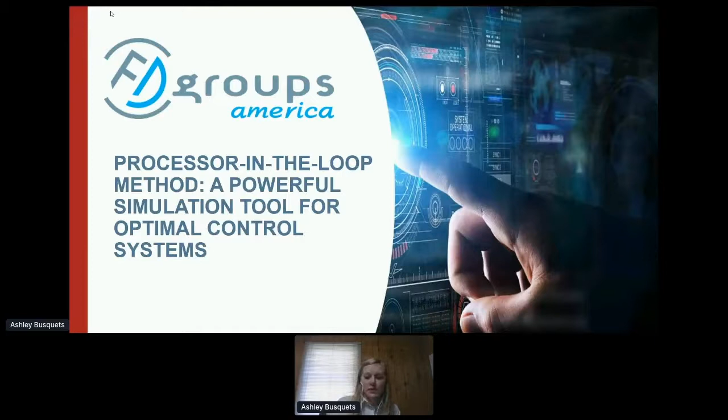So today I will be talking about processor in the loop. This is a method that's a powerful simulation tool for optimal control systems. As Mike discussed a little bit, our parent company is the Fluid Design Group in France.

This includes Cerebrum Engineering, which is the engineering and multi-physics simulation, Fluid System, which is focusing on systems and components for fluids, FDE, which is the electronic components and ECU, and then under these groups are also the FD groups America and in China, bringing the expertise of the entire group into these regions.

FD Groups America specializes in multi-physics model-based design workflows. We specialize in design with simulation, and this includes testing to feed the model, to validate the models that we create. We work closely with any collaborators that we have to meet the requirements that are necessary to the projects.

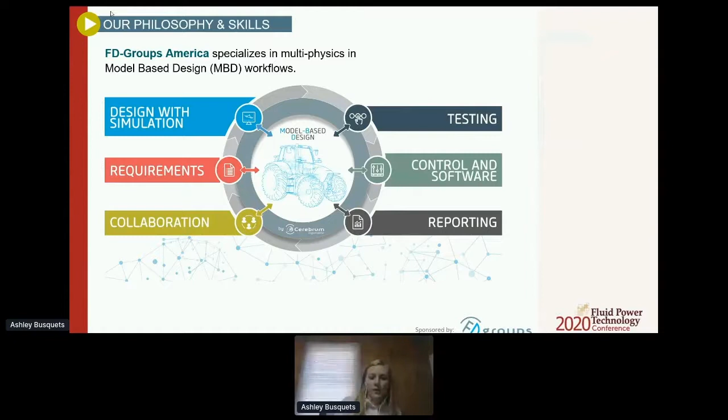Also included in the part of the simulation, which I will speak more about today, is the control and software aspect. And then finally, like I said, working with our collaborators, reporting in the end to give the best outcome of a project possible. We work with 1D multi-physics systems modeling, but we also include 3D systems as well.

This includes the FEM in the multi-body structural analysis. And we can also do some co-simulation between the 1D and 3D to really have a very precise model. Included in these models, we can consider the CFD when it comes to aerodynamics, hydraulics, even thermal. And again, what I will focus on today, the control systems.

So designing and tuning supported by model in the loop, software in the loop, and processor in the loop. And also reverse engineering, so component characterization in order to feed our models such that we have a well-working model. And also there's a part that we can do tools and specific applications development for various companies that need something more specific.

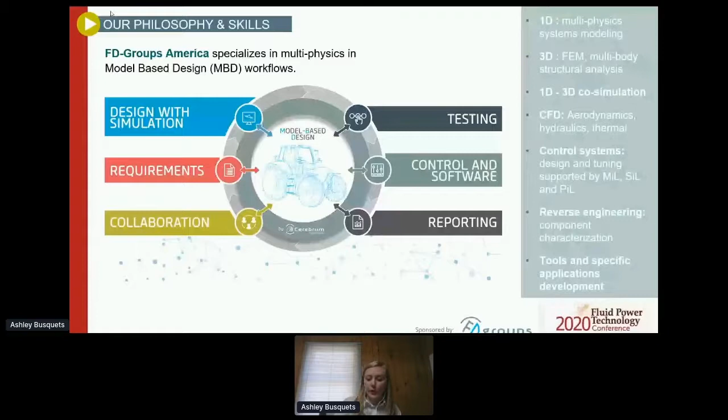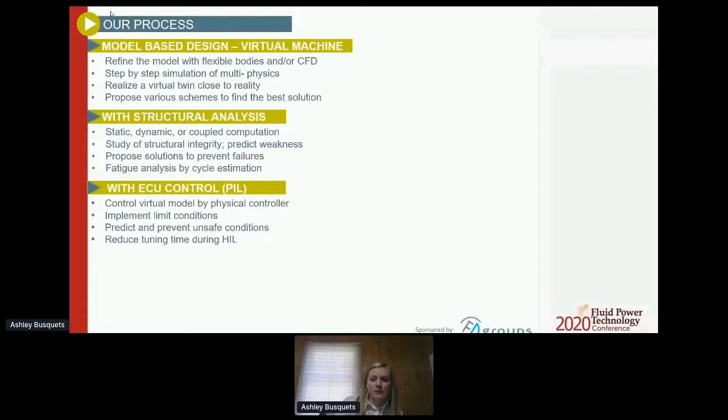Our process, like I said, this model-based design, we start with 1D multi-physics modeling to create a global virtual machine. We can feed this model with 3D dynamics, so considering the flexible body, or also the thermal flow CFD, as well as, as I said, the reverse engineering.

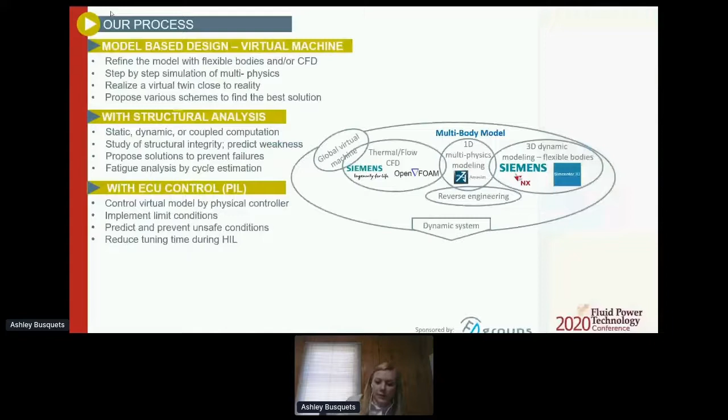And once we have this complete dynamic system, we can focus on a structural analysis. And so from this dynamic system, we can deduce the forces on the parts, feed this into a FEM analysis on each component, understand the stresses on each part, and get a durability lifetime of the part using the SN curves. But again, what I will focus on today is the PIL method.

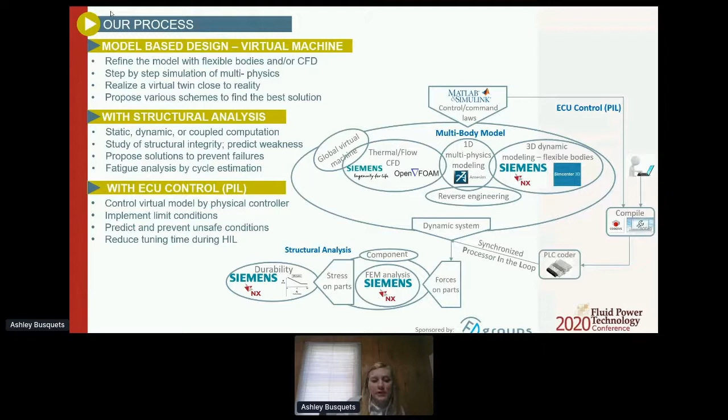So we can control the model virtually, but through a physical controller. This way we can predict any unsafe conditions in which we're able to prevent these in the field then, and also reduce the tuning time during the HIL method.

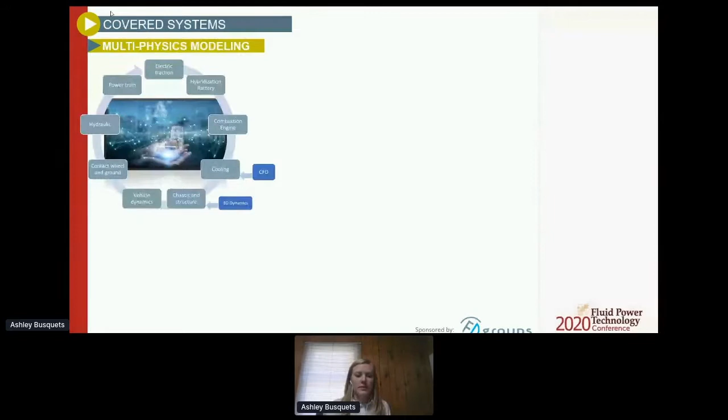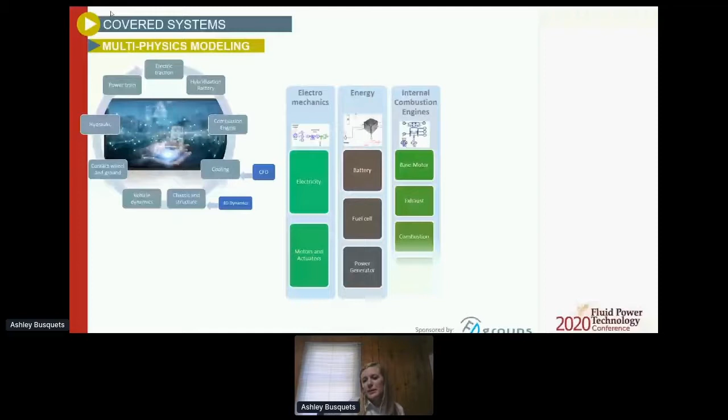We cover all systems. So when I say multi-physics modeling, I'm speaking of a complete model. We can include the electromechanics, the energy, internal combustion engines, any thermal considerations, mechanics, hydraulics and pneumatics, and then, like I said, focusing today on this control. Just a few definitions as I go forward to make sure we're all on the same page.

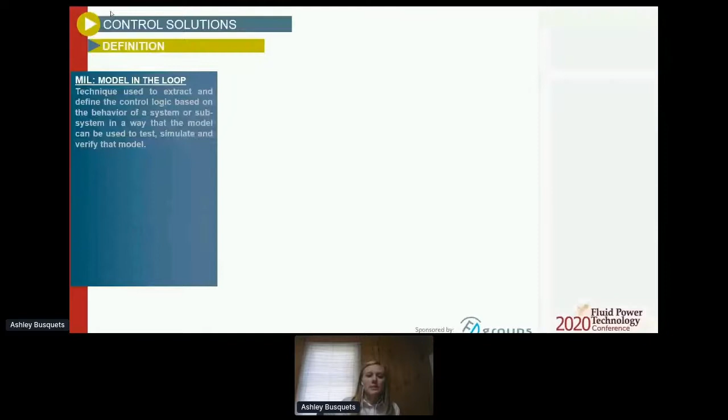The model in the loop, the MIL method, is a technique used to extract and define the control logic based on the behavior of a system or subsystem in a way that the model can be used to test, simulate, and verify that model. So this is the first level of validation for any algorithm. And from here, we decide on the choice of controls.

At this point, the model is very precise when it comes to the dynamics, including everything possible. But it's a long calculation time, and the control system and code is not as high of a level as it will be later on.

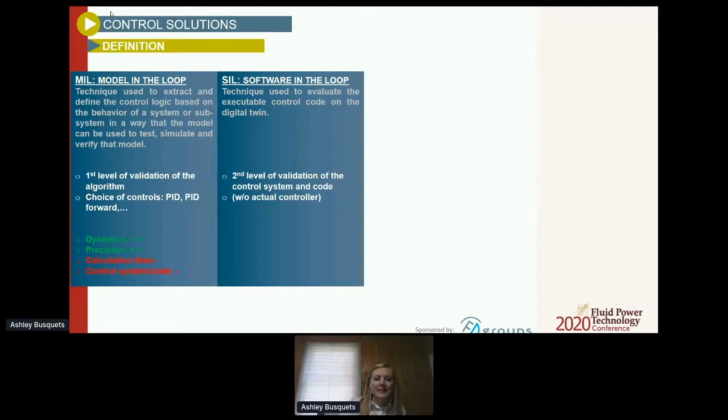The SIL method, which is the software in the loop, is a technique used to evaluate the executable control code on the digital twin. So here, this is the second level of validation of the control system and code, but this is at this point without the actual controller in the loop. Still, we have very high dynamics and precision, a longer calculation time, but we're working more toward a higher level control system.

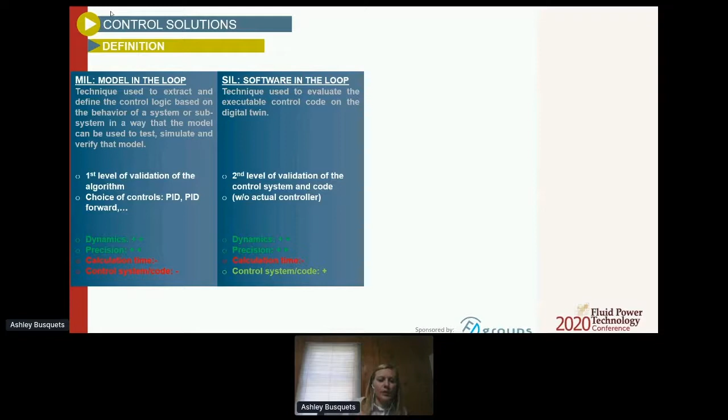From there, we go to the PIL asynchronous, which is a real-time model. This is a technique used to evaluate the processor with the executable code on a simplified digital twin in real time. So this is a third level of validation.

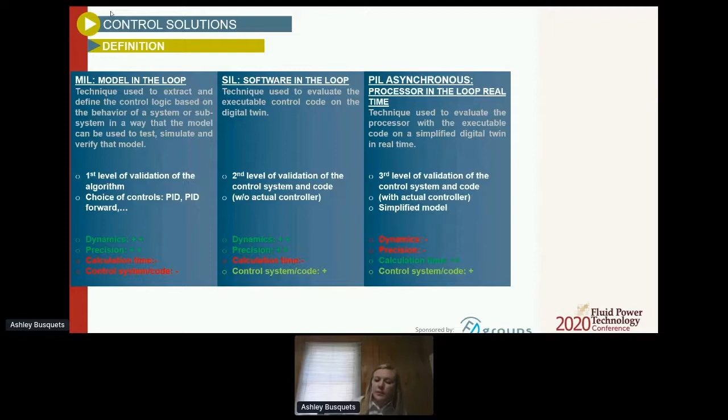And at this point, we actually connect a physical controller, but it's on a simplified model such that we can reach that real-time communication. So the real-time model is quite a bit simplified. So the dynamics and the precision are not as high, but we have a much faster calculation time and still a good level of the control system at this point.

And then finally, the PIL synchronous. So this is the processor in the loop synchronous. It's a technique used to evaluate the processor with the executable code on the complete digital twin. This is the fourth level of validation of the control system and the code.

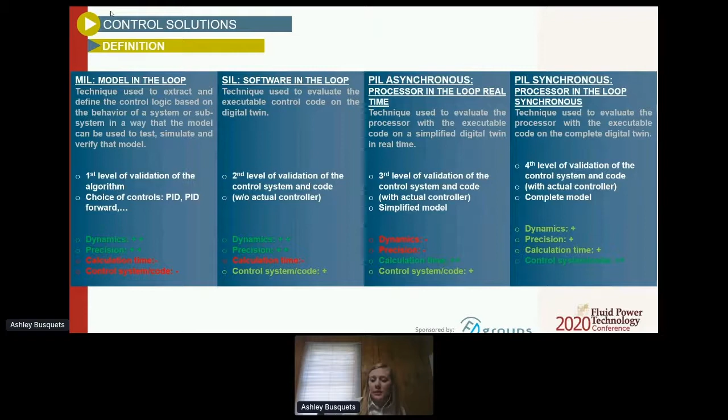So again, you're still using the physical controller in the loop, but you're using it on a more complete model. So you have a good level of dynamics and precision, somewhere in between on the calculation time with that balance, but you're at the highest level of testing the control system here to really make sure that it's going to work. At this point, I want to mention a little bit too, sometimes we may use a little different terms in order of PIL and HIL.

So after this, the HIL comes into play. We call this the hardware in the loop. That's where we actually connect this physical controller that we're testing on the digital twin to the actual hardware, whether that be the machine, the tractor, anything like this, and test it at that point. At this point, the controller should work very well. The only difference is that they will need some fine tuning in order for the feel of the operator, which we'll never be able to get in the digital twin.

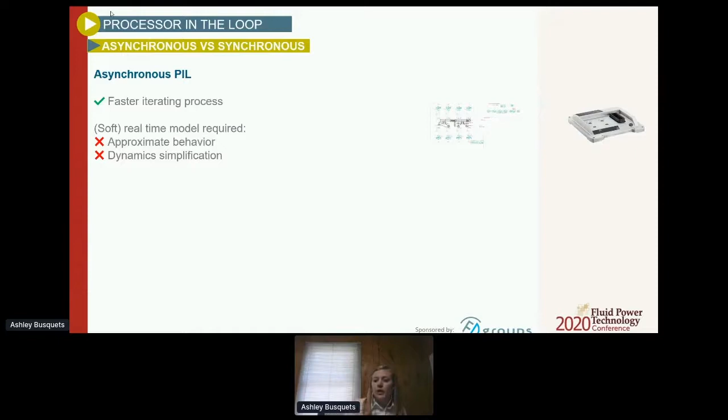Just a little more on the asynchronous versus synchronous methods. So the asynchronous PIL is a faster iterating process because it's a real-time model, but in order to get that speed to communicate with the controller, we need to approximate the behavior and the dynamic simplification. So you can see here on the figure, they're speaking back and forth between the controller and the model as fast as they're providing the information to one another.

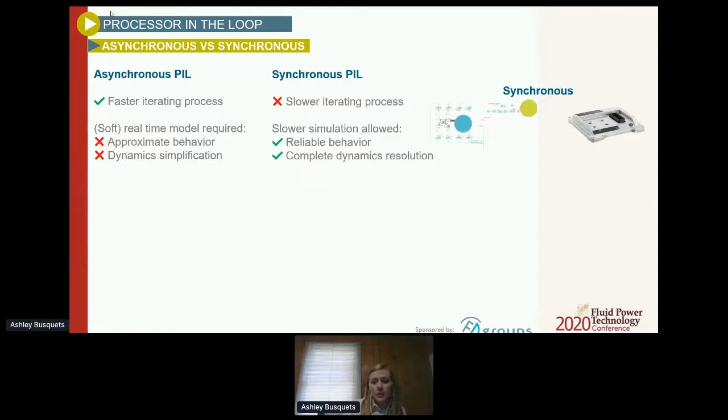When it comes to the synchronous PIL, it's a slower iterating process between the controller and the model, but we have a more reliable behavior and complete dynamic resolution of the model. So you can see here, they pass information back and forth one at a time as it's calculated on each. Again, it takes a little longer, but we need to find this balance then between the reliability of the model and the speed.

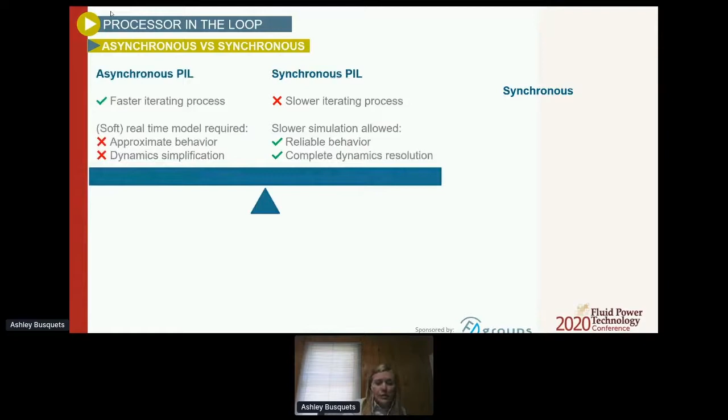We mainly use AMESim as a user library. Specifically at Cerebrum, they've developed a customized library in AMESim to be able to receive and send CAN frames via a simple USB adapter. Also this library integrates a protocol that allows the synchronization between the model and the processor. So there's something additionally added there so that they know they have to wait for each other to communicate. Like I said, this is something specific to our company because we use this synchronous PIL method very often in many of our projects.

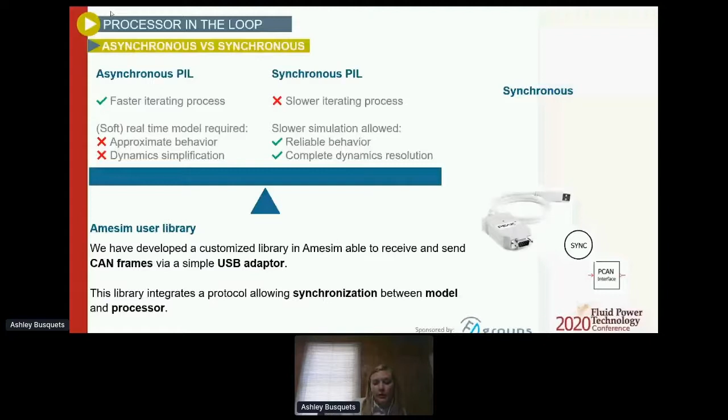And when it comes to the benefits of using the PIL method, it's mostly about optimizing the tune time. So you can test, improve, and debug the controller before it's ever on a machine. It's solely on the digital twin. So we get, as a consequence, cost efficiency. This is reducing the time to optimize and to get that final product to market.

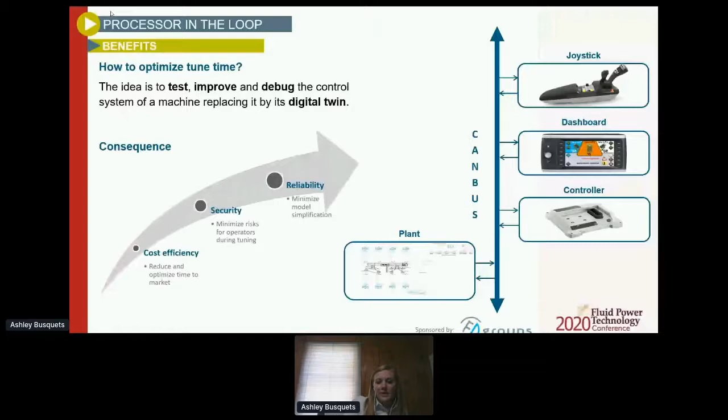Also security: you minimize not only the risk to the operators during tuning time, but also the risk to the machine itself. So you can test it at very extreme conditions. And also reliability. So when it comes to the synchronous PIL method, you can minimize any simplifications on the model such that you can still get a good test of your controller.

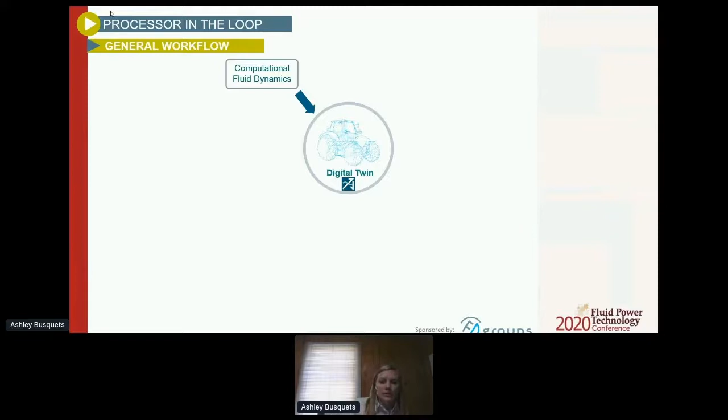So just a general workflow to really understand better how we go about this here. You start with a digital twin. You can feed this digital twin with CFD analysis, structural analysis, and reverse engineering so that we have the highest level of this digital twin. From there, we can test the component sizing, failure prevention, and design optimization.

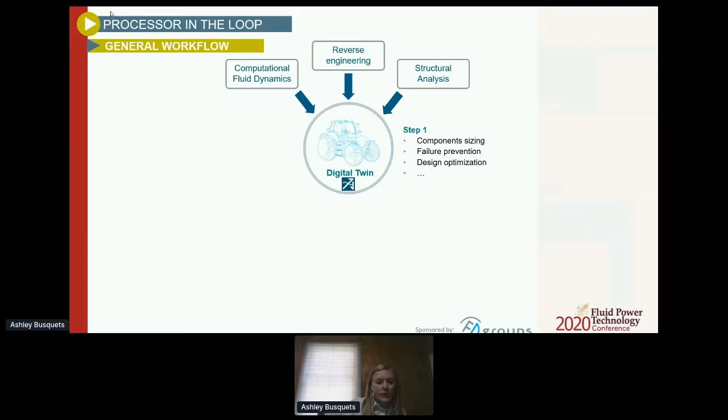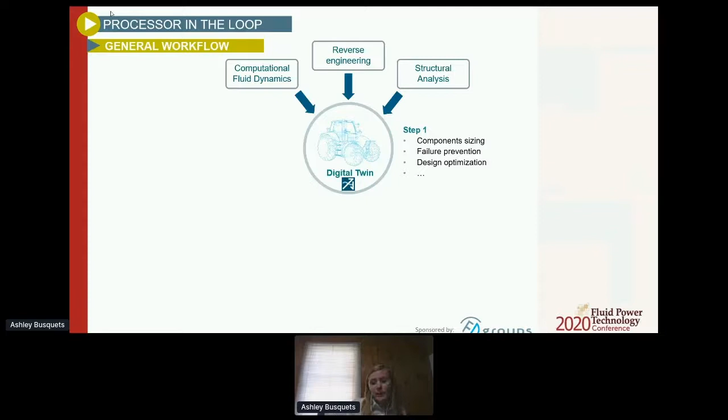So we really make sure, whether we're trying to optimize the machine, starting from scratch, or using a machine that's just having some difficulties that we're trying to find, that we have the best model and the best design, because you have to have that first before you start with the controller.

So from there, we simplify this digital twin when possible. It's not always possible, but to be able to test the controller with this reduced model, we can test it back against this complete digital twin so that we can verify the accuracy, to be sure that what we're testing is worth anything.

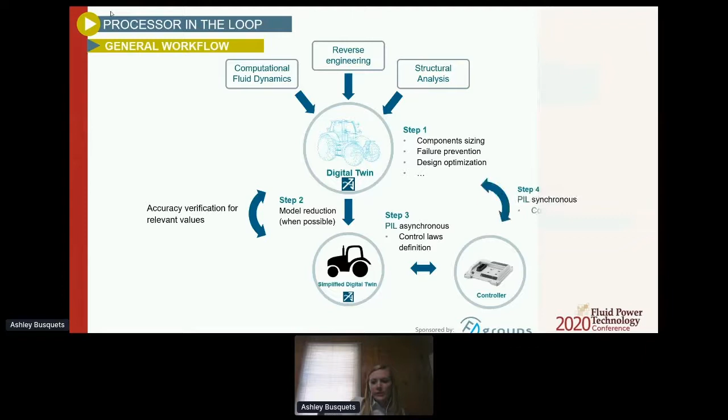From there, we can connect the controller and do this PIL asynchronous method on the simplified digital twin to just simply test the control laws, make sure they're defined correctly, everything's working with connecting the controller. And then from there, we can really test it in the PIL synchronous model, again, validating these control laws.

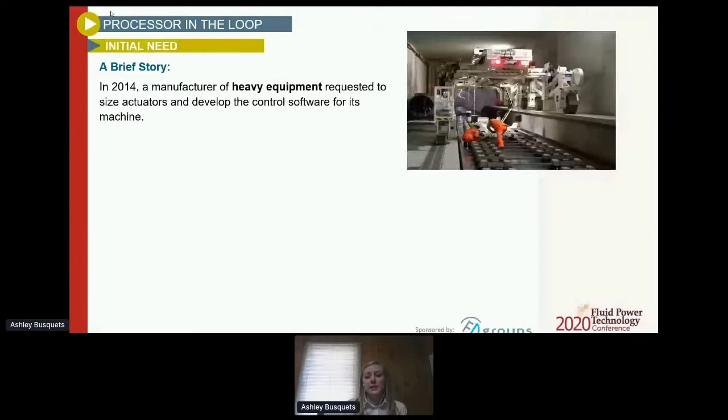So just a brief story, how we even got into this in the first place. Back in 2014, there was a manufacturer of heavy equipment. They came to us asking us to size some actuators and develop the control software for their machine. We modeled their machine using Simcenter Amesim, so we could correctly define these control laws and have confidence in this.

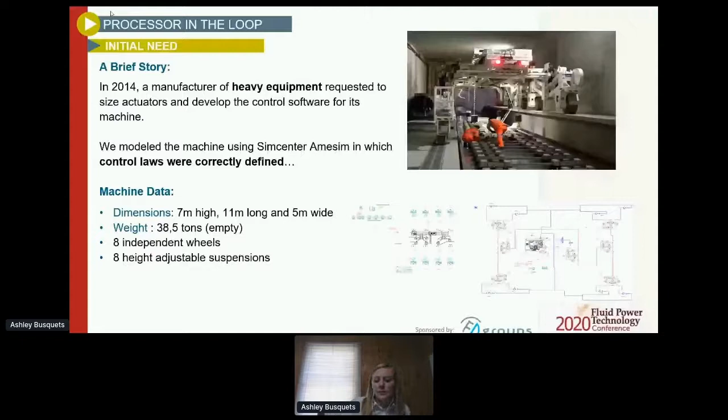Just to get an idea of the machine, 7 meters high, 11 meters long, 5 meters wide, very large machine. At 38.5 tons, that's empty. So even then you can have a larger weight, 8 independent wheels and 8 height adjustable suspension. So a pretty complex machine as well.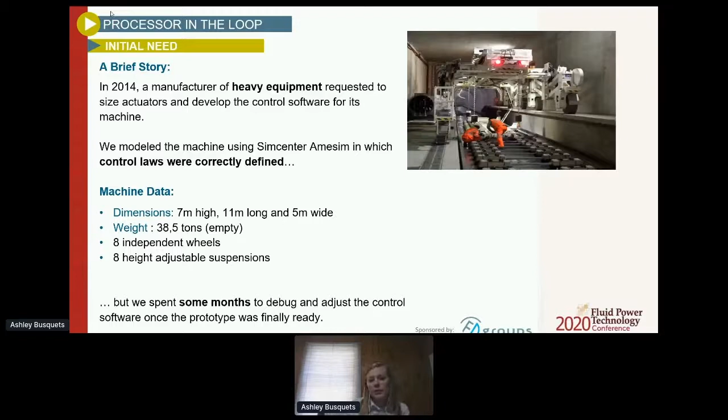So saying that, we spent some time then after some months to debug and adjust the control software once the prototype was finally ready. So no PIL method at this point, only directly to this HIL, connecting the controller on the machine. So we realized we really need to introduce this PIL method, implement this, and keep this a standard so that we can save this time later on down the road for our customers.

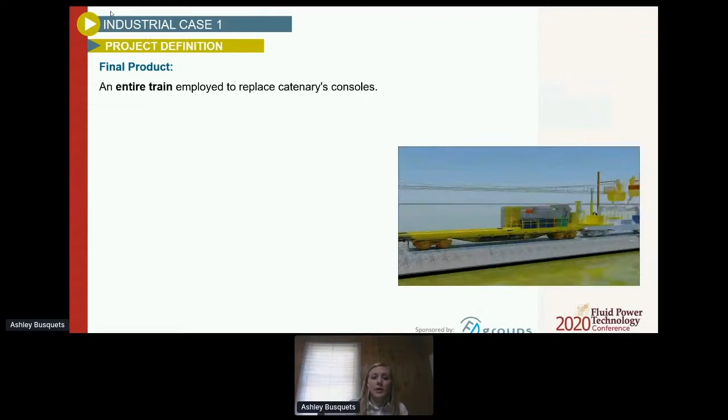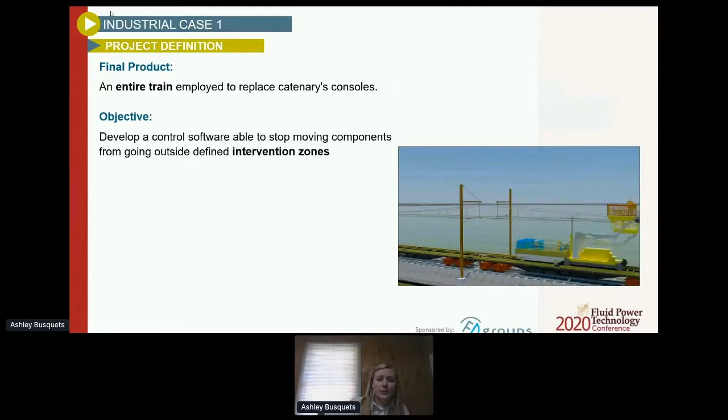So I'm going to get into some examples of some cases that we've done since. So the first one I'm going to talk about is an entire train employed to replace the catenary consoles. You can see the video along here showing what I'm talking about. The objective of this project was to develop the control software to be able to stop the moving components from going outside the defined intervention zones. Very important when it comes to safety here.

As you can see in the video there, you have 2 tracks. So you don't want this bucket to be able to move into the other lane of an oncoming train and risk any harm to the operator as well as the equipment itself as they're doing this work. To get a better idea of what I'm talking about here, the train is composed by 2 trolleys moving on wagons, having 2 of these platforms each. One wagon has 4 different cranes and 2 platforms.

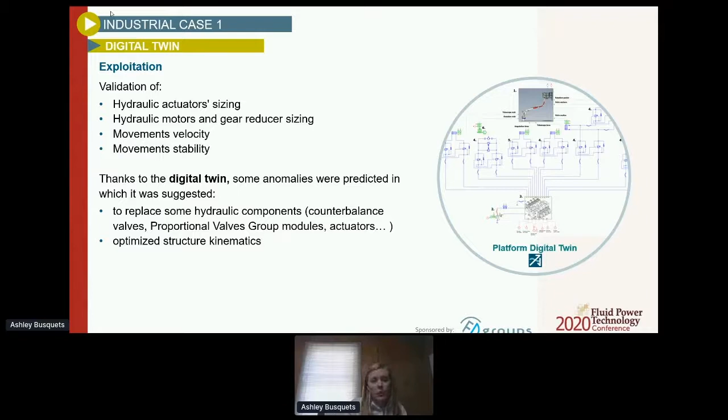So then, exploiting the digital twin, the first part was to create this very complex model. We validate the actuator sizing, hydraulic motor and gear reducer sizing, the velocity of the movements, and also the stability of these movements. So from there, we could actually utilize this digital twin and find that they needed to replace some of the hydraulics on their system, such as the counterbalance valves, the proportional valves and actuators, and also optimize the structure kinematics so that there was more stability for the operators that were using this.

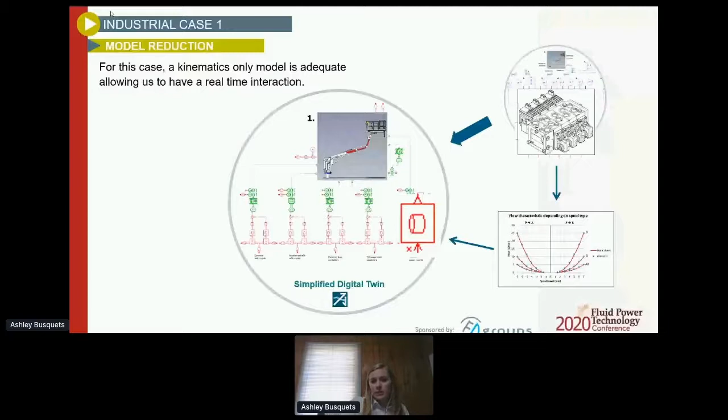From there, we could reduce the model then once we had the complete model. So we could actually, in this case, have a kinematics only model. This was adequate to give us the real-time interaction once it came to the PIL asynchronous. So for example, what I mean by this model reduction, we could take an actuator and replace it with a spring damper, or we could take a valve and just replace it with a simple flow characteristic table, and use this to get a little bit of a dumbed down version of the dynamics, but still able to test our controller on that. From there, I want to show some results.

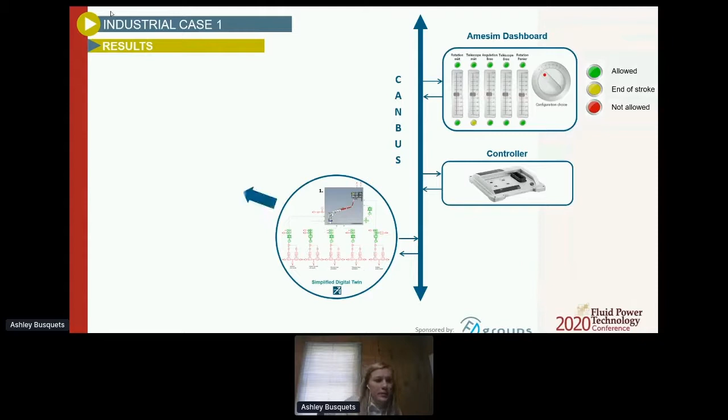You can see here we have our dashboard in Amesim in which we can control the motion of this platform connected through a simple USB for the CAN bus for the controller to the simplified digital twin model, which was in this case in asynchronous testing in real time. When I play here, you can see this live view of what we're getting from the model testing the controller here. Just a few points to watch as the video plays.

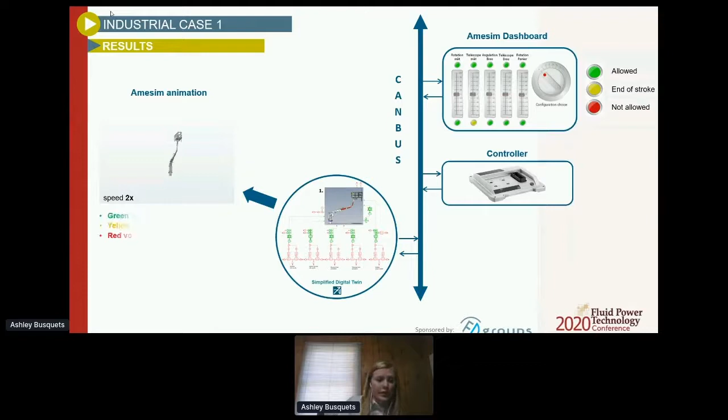The green means that the platform is in a safe zone. The yellow is a buffer zone, and the red zone is off limits. So you can see it kind of gets into that yellow zone before it stops at the red zone there.

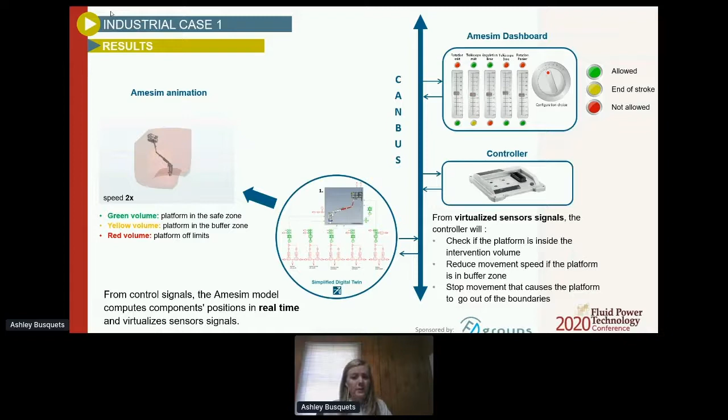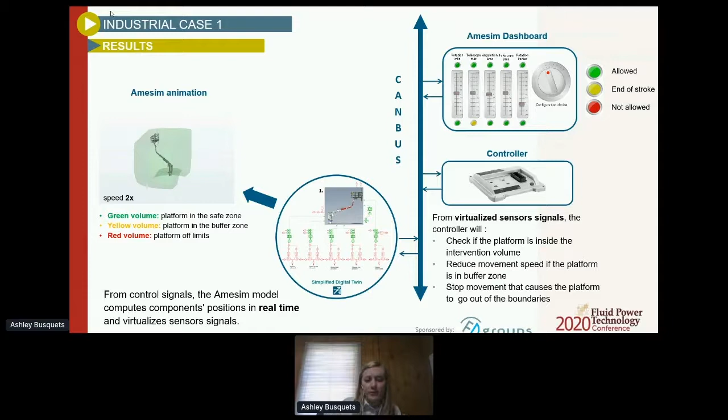So the Amesim model computes the component's position in real time in virtual sensors, and it sends this information to the controller. From these signals, the controller checks if the platform is inside the intervention or the green zone. It starts reducing movement speed as it reaches the yellow buffer zone, and stops movement completely at the red zone, as this is off limits due to safety precautions that need to be taken.

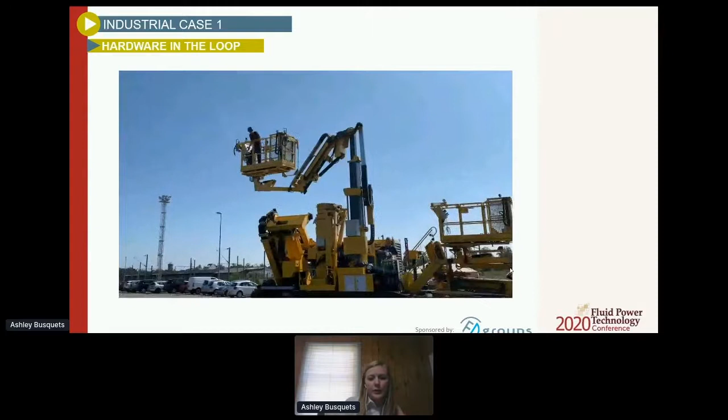From there, we were able to actually implement it on the machine and show that it works, with minor tuning. You can see here it starts moving. It gets to a point outside of the safety zone, and it slows down and stops. So the controller does exactly what it's expected to, minus a few minor tuning points for the feel of the operator.

The second case I want to talk about is a Locotractor for the railroad maintenance train. The objective here is to not only check the hydraulic transmission and component sizing, but then program the controller such that it manages traction control.

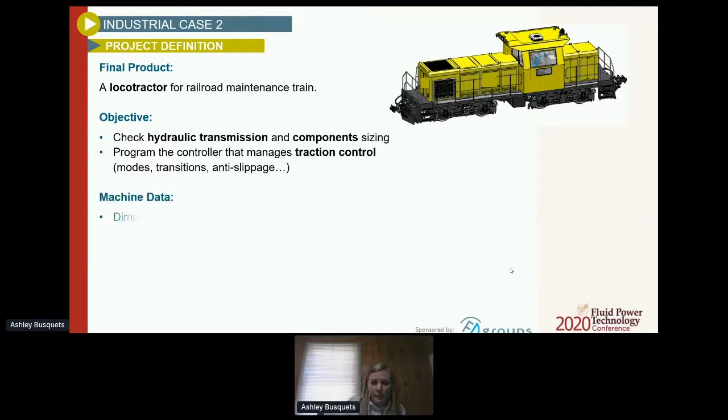I think I have a picture here that shows the grade of the land this train usually travels on. It's very important that in different weather conditions, the train is not slipping and that it's able to smoothly transmit power as it's going uphill, downhill, and maintain a constant speed. In other words, safe for the operator and also anyone around.

It's about 4 meters high, 12 meters long, and 3 meters wide, and it's 52 tons. It can haul up to 6 wagons at 20 tons each. And the track slope, like I mentioned, is a 30 per mil grade - a decent slope for a train of that weight.

Then with the model, with the digital twin, once complete, we were able to validate the engine, the hydraulic pump, the motors and gear reducers, and also the sensors that would be used for the controller.

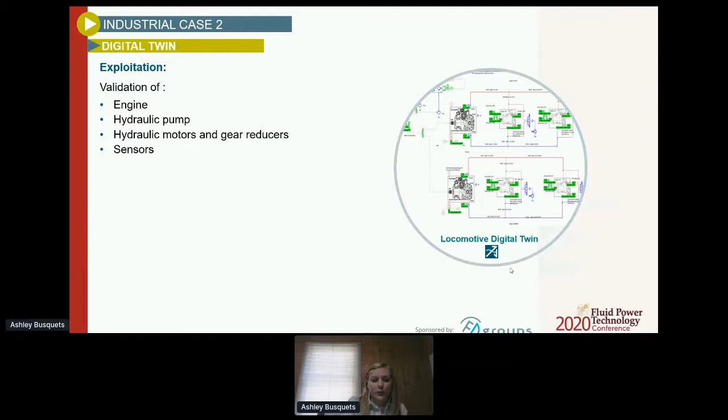Very important with this one is the energy consumption anticipation. For the train, we were able to take into account the drag force on the locomotive and the wagons, the rolling resistance, the consumption due to the cooling system, and the rail slope and curvature. Again, this is very important, to be able to consider the real world in the model such that when you connect it to the actual train, it works as expected, because taking these into consideration makes a large difference.

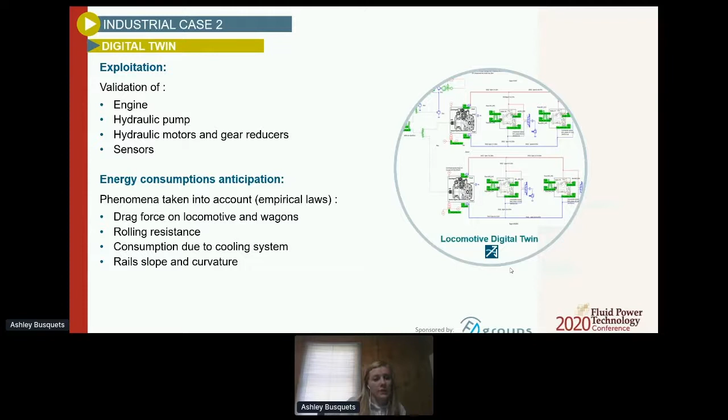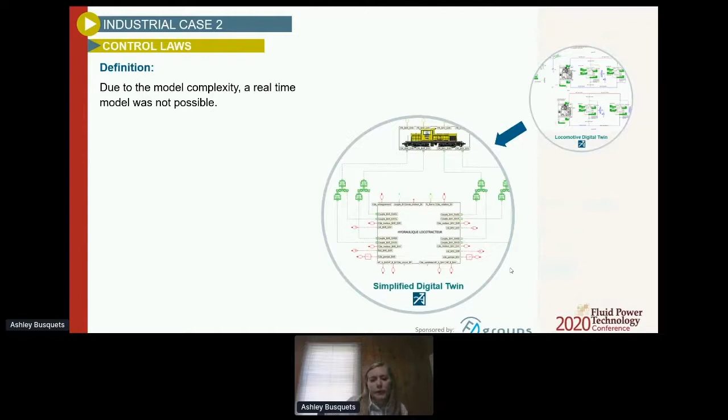When it comes to the control laws, this model was very complex, so it wasn't possible to do a real-time model - it just wouldn't give us the information required. So utilizing this library that was created, we could do the synchronous model and test it directly.

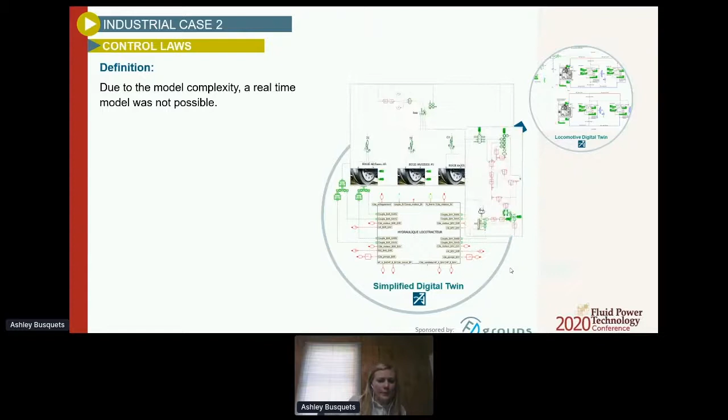The control laws were defined and tested thanks to the model in the loop, and then we could use the synchronous PIL method to validate them.

Showing some results here, we had a dashboard set up in Amesim, again similar to the last one I showed. The controller connected through a CAN bus to the computer, directly speaking to this somewhat simplified digital twin. From the controller, the goal was to change modes smoothly - so if you go from, as you can see on the dashboard here, traction to holding to neutral, it needed to have a smooth shift.

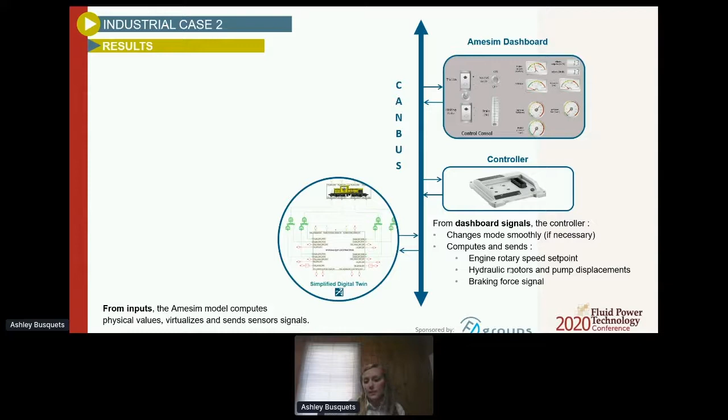So the controller then sends the engine rotary speed, the hydraulic motor and pump displacement, and also a braking force signal that you can command there. Then the Amesim model computes the physical values and sends the sensor signals back as those two talk.

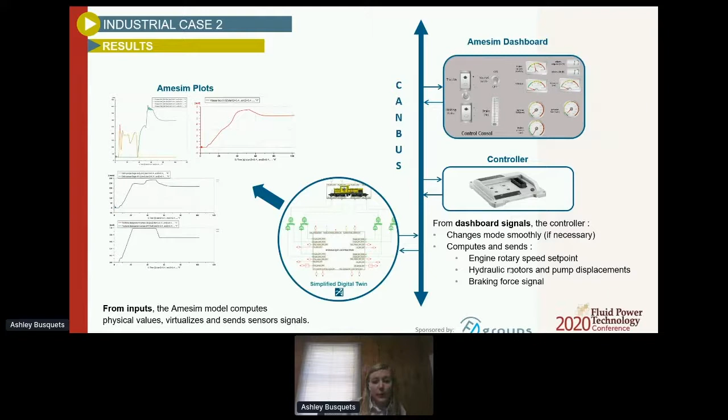And we can see some plots here of the speed, the displacement of the engine, and the displacement of the motors and pumps, just to really make sure that what we're getting makes sense and is really what they're seeing on the actual train.

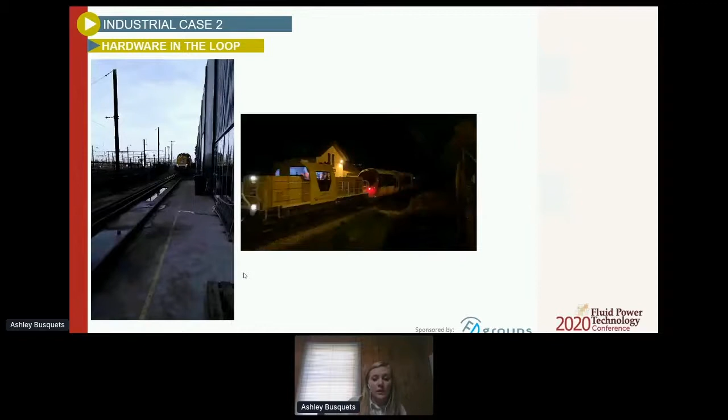And then testing this on the hardware in the loop. It's not so exciting, but the exciting part is that we could really just plug in the controller and it worked, except for a few minor adjustments due to the feel of the operator.

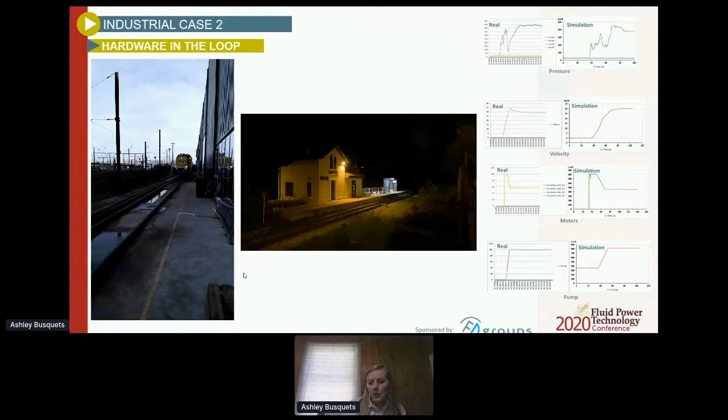The more interesting part maybe is to look at the plots, comparing the real plots on the left for various different aspects that we're looking at to the simulation plots on the right. And you can see we're matching quite well. The controller is working as expected once it's actually on the hardware.

And then finally, one last case I want to talk about here. We're actually in the process of working on this project for an autonomous vehicle. It's a tractor sprayer, and the goal of this project is to optimize the field use and yield. So we need to develop control algorithms based on the available or implementable sensors to safely drive the tractor on an optimal path while avoiding obstacles. By obstacles, I mean anything stationary in the field, whether that's a building or tree, but also if there's another tractor or a person unexpectedly running across the field, we need a safety protocol in order for that tractor to prevent an accident from occurring.

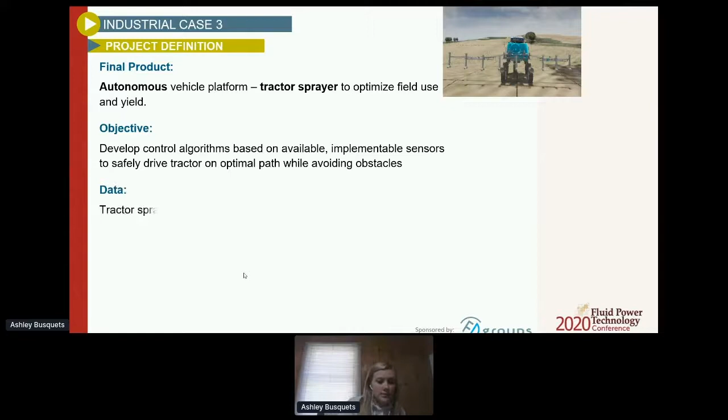So this is being tested on a tractor sprayer, on field terrain with surface information that we're able to import from NASA data. We add other visual elements to test, like vegetation, trees, weeds, because that's important for the sprayer too. And then buildings or fences that are stationary in the field, as well as people and animals that may be a little more unexpected. And we need to be able to operate in various weather conditions.

So the important part here is that maybe it's raining or overcast, and you're not getting as good a visualization from some of your cameras. So we need to take that into account under those situations to still maintain safe operation.

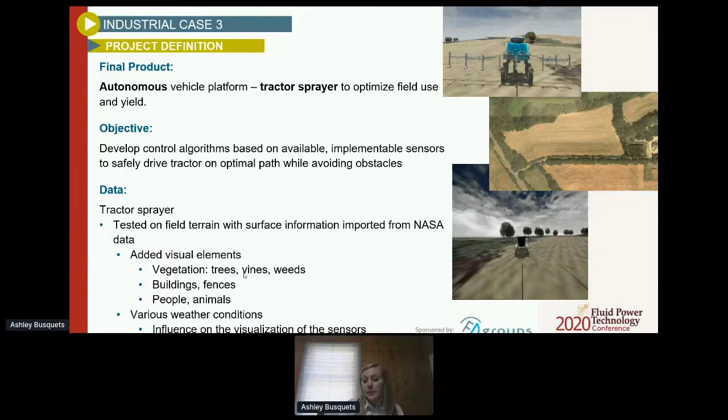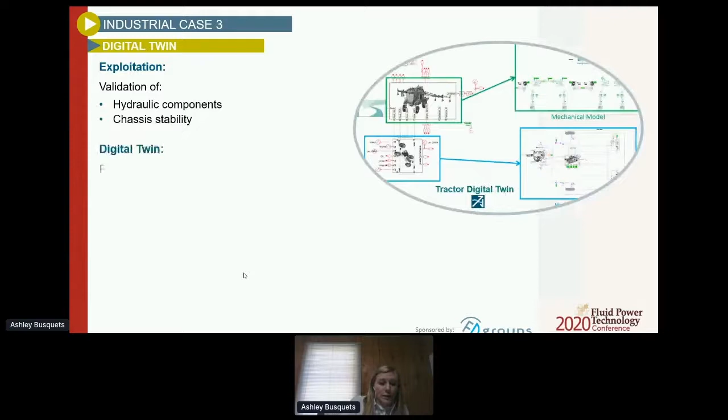So the exploitation of this model first was to validate the hydraulic components and the chassis stability. From there, the physical model of the vehicle needs to include the mechanics, so the chassis, the suspension, the wheels, the ground contact, but also the hydraulics, so the pumps, motors, valves, etc.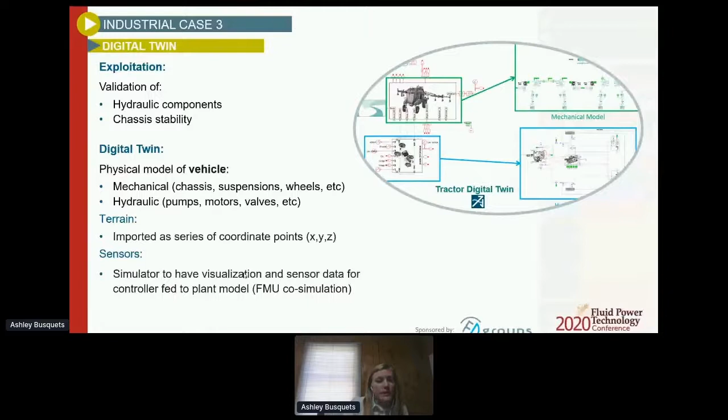And then the terrain, like I was saying, we were able to import this as a series of coordinate points from NASA so that we're really testing it on something physical, not just made up in a simulation world. We include sensors to visualize this data. This is fed to a plant model via FMU co-simulation, such that we can have contact between the model, the sensors, as well as the controller.

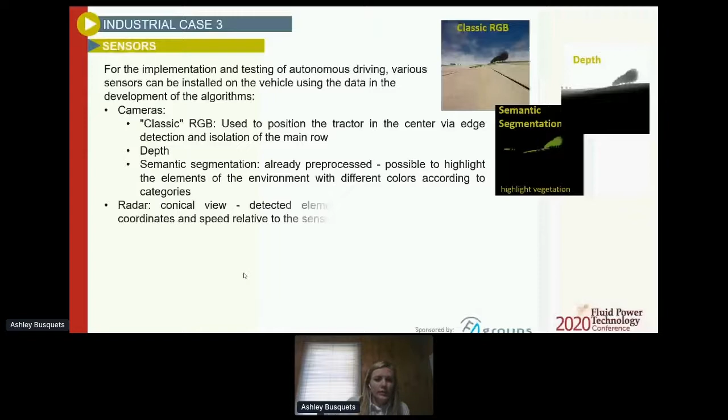To get into a little more detail, the sensors we're using for this can be many different types, whatever's necessary for the specific autonomous driving case. Such as classic RGB, which you can see on the right, kind of what you and I would see with the eye. The depth, the black and white one there, so you can tell how far away things are. And the semantic segmentation, where you see different colors according to categories, however that's set. Radar, a conical view, which detects elements with 2D coordinates and speed relative to the sensor.

LiDAR, which is a laser remote sensing, so you can obtain the position, and you can see that there on the right. And then the GNSS, Global Navigation Satellite System, as well as we could implement an IMU, accelerometer and gyroscope. So there are several levels of modeling and settings possible for each sensor. And these sensors, for the future view I'm going to show, are placed between the wheels at the front of the vehicle.

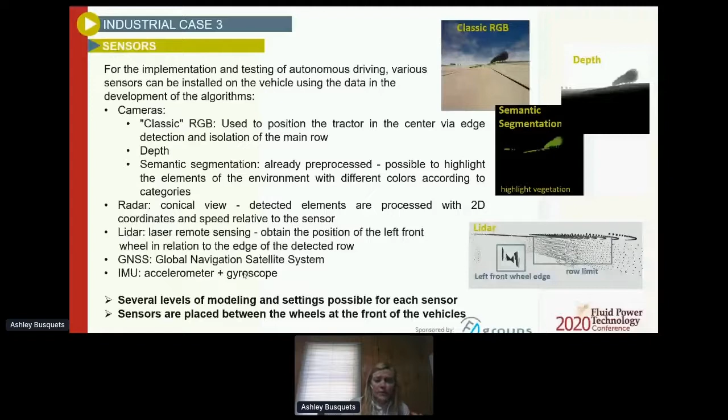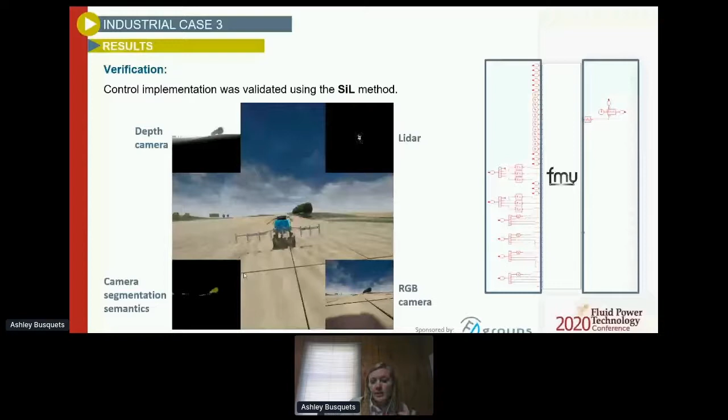So then getting into some results, we could validate this control implementation via the SIL method. And you can see here the tractor running along, and the views of the different cameras. In this case, we're using a depth camera, LiDAR, the semantic segmentation, and the RGB. And like I said, we're using this FMU between the model, the controller, and the visuals here.

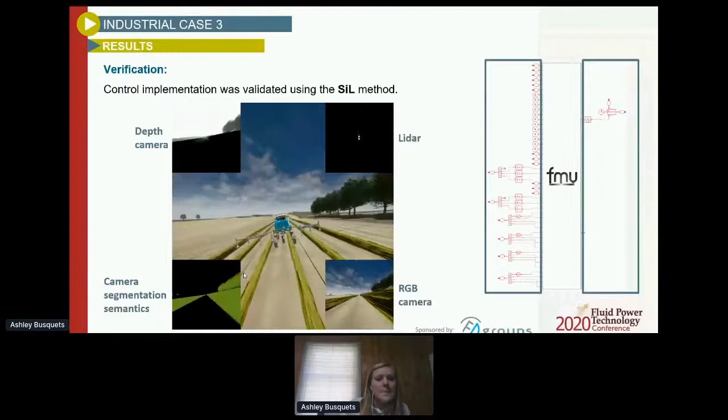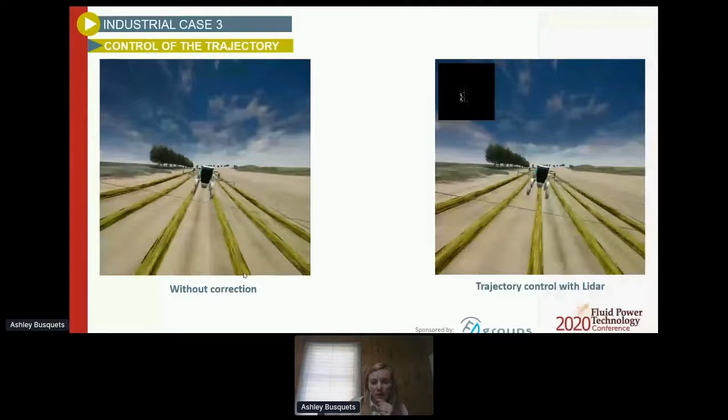And you can see here then, just in a different view, how it maintains the corrections for the center of gravity.

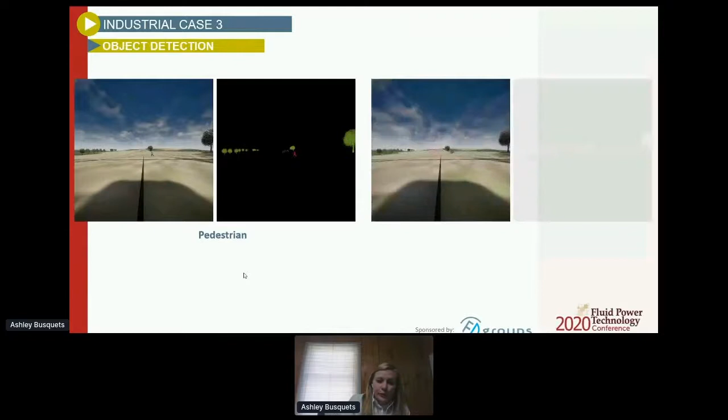As far as object detection, you can see here again how we can use these different camera views to spot something and then add into the controls to allow it to correct the sprayer from running into anything like that.

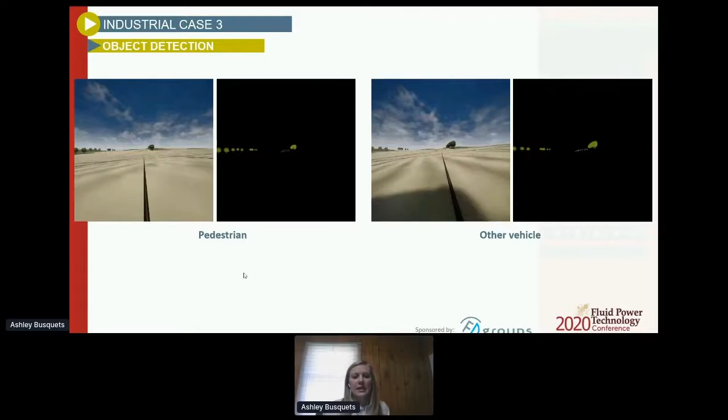Another interesting one is weed detection. With these sprayers, it's important to distinguish the crop from the weed when it comes to crop protection. So we can isolate the green elements of the image and then label them as a weed area, whether it's uncertain or it was initially detected but deemed not of interest.

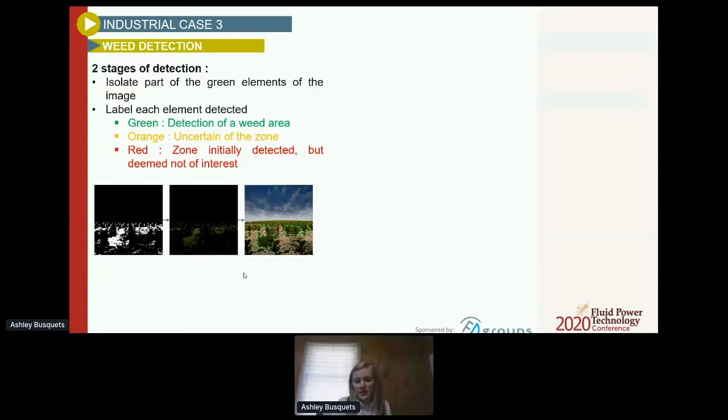You can see on the video here just to get an idea of what this image would look like. And then we can implement this into the control system, like I said, to determine a weed from a crop in order to get the maximum crop production.

So just to go over everything in general, the benefits of this PIL method is cost efficiency. In this case, the real machine is replaced by its digital twin, and the control system is developed before there's any prototype manufacturing.

This way we can really get a feel of what's happening before any money is spent on a prototype at all. And also, like I spoke about a little bit, we can really optimize the system before trying to optimize with the controller, which is also very important.

So at the time of the prototype, we can deliver a ready-to-use control system. And then when it comes to HIL, the tuning time is reduced by 5 times.

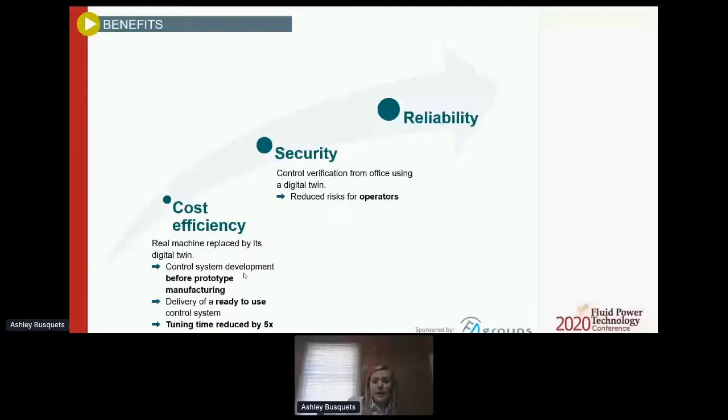For security, the control verification is done from the office using the digital twin. So I don't pose the same risk sitting at a computer running these models as it would to the operators in the field or even to the machine in the field.

When testing some very critical situations, I can push it a little further without having to worry about safety—I should say safety of myself while testing.

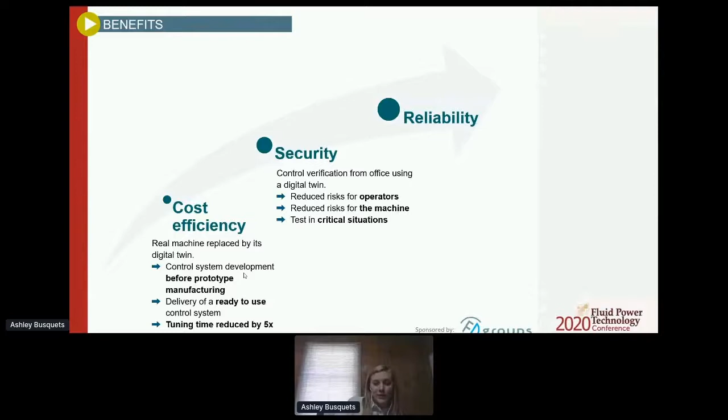And then reliability: the control laws can be verified with a complete model. This means that 80% of the work is done before the tuning time. The remaining part is just the comfort adjustments of the operator, which, like I said, you cannot feel in a model, so that needs to be done at that point. But we can get up to 80% of the work done before it's even tested on the actual hardware.

For that, I want to thank you for your attention.